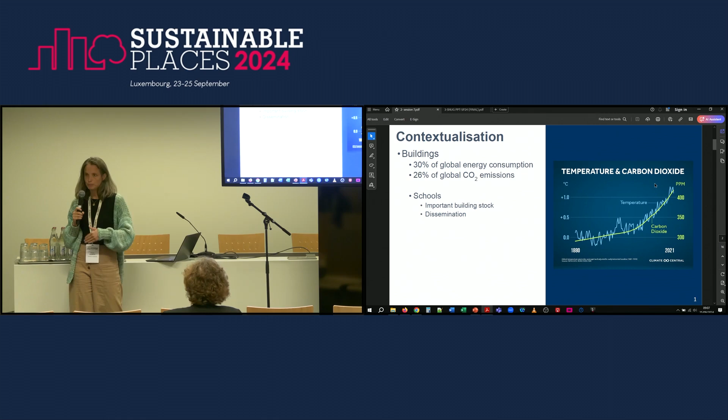The choice to work with school buildings is mainly due to the important emissions from the building sector, but also from the important building stock of educational buildings, older buildings. And of course, the great outreach and dissemination capacities of these buildings, where we are looking actually to work closely with students, citizens of the future, so that this can be replicated outside of the school environment.

Our approach is based on this 5-step methodology for schools to become more energy resilient. It starts actually by understanding the environment, which means knowing the different stakeholders. I don't know how it is in your countries, but we are working in Luxembourg and we have so many stakeholders in one educational building with very different interests, with very different approaches with regards to the building. So that's the first step, understanding who these stakeholders are, what they know about energy efficiency, what their interests are in working on that, what kind of resources they have, what kind of activity they already do.

And then to group these stakeholders in one working group, or as we called it, a learning community, so that we can profit from experiential learning using the school as a living lab. Then, in a second step, we propose to use education to actually engage with the community. It is very focused on the students, of course, the main users of the buildings, but of course including staff, teachers, and everyone that is related somehow to the way that the building is operated.

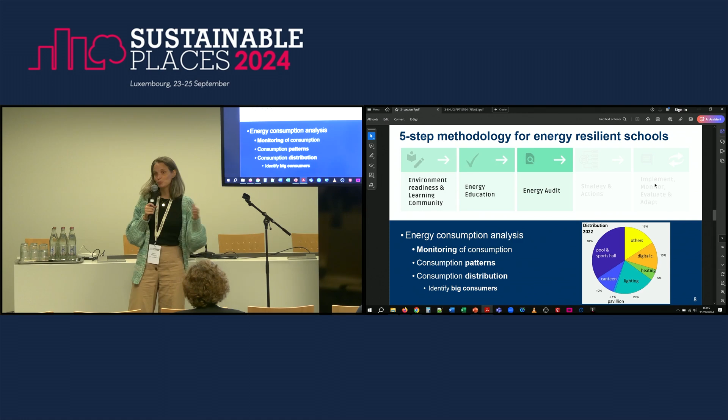Another analysis that we propose is to identify the different users, so the big users. So we install smaller electric meters to identify more the distribution of the electricity consumption, where here, for example, we can see that for this building, lighting is responsible for a big part of the consumption, but the sports hall and the swimming pool are responsible for more than 30% of the total energy consumption of the building.

And then we can start thinking about a strategy to reduce the consumption, discussing again with the community and trying to find solutions that would be adapted to their requirements and that could provide great impact. So as I said, we focus a lot on acting on the baseload consumption, and we propose these reduced operational modes for these periods. When the building is not being used, we don't need to heat as much. I know it sounds very obvious, although it's not.

And that's why we need a good monitoring plan, because people think they know how the building is being used. But when you start analyzing the data, the consumption data, you see that actually they thought the things were off. They thought that the equipment was not running. We need a follow-up. We need people following the way it's being consumed, and then adopt the proper operational set points.

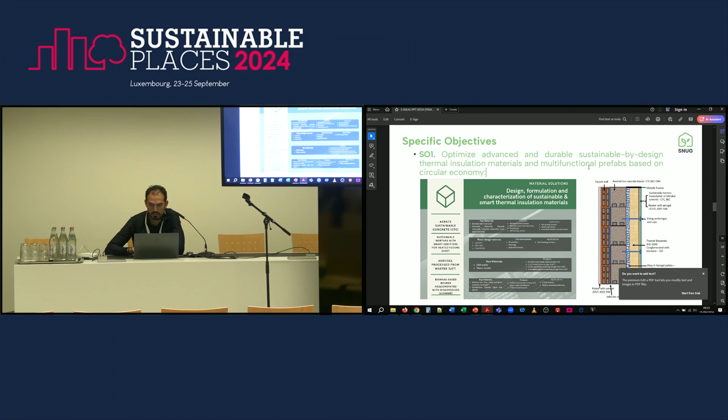a wall. And the other one that I'm gonna go deeper into, because it's ours, developed at AIDIMME, is the biomass-based boards agglomerated with bioadhesives. We started studying many biomasses like rice husk, hemp, posidonia, sunflower. And the bioadhesives are made by another company called Chimar from Greece. They're experts in this part, and they're made out of tannins, lignin, and starch. What we want to develop is an ETICS system for outer insulation, and it also could be used for indoor insulation.

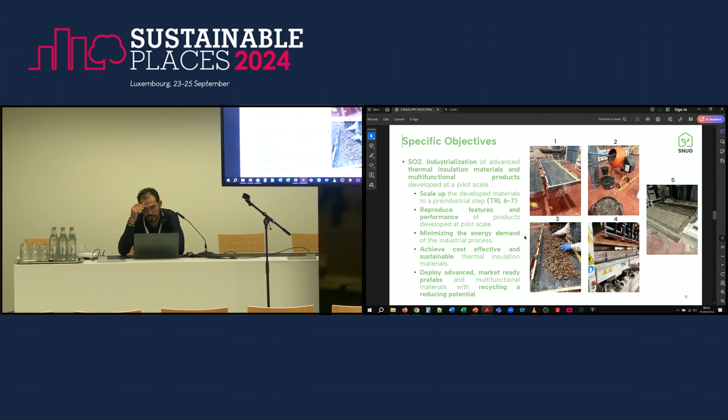The second specific objective is to industrialize these products. Now you can see some pictures about the industrialization that we made in another national project. So this is like a background about what we're gonna do now. We went to an industrialization company, and they prepared some molds. Then they prepared the mixture, this is with Posidonia specifically. Posidonia oceanica is a sea plant that is protected because it's one of the most important oxygen providers in the sea.

And this Posidonia is taken out from the coast, from the seaside. And many times they just burn it, and there's nothing done with this material. So we take it, we dry it in some big dryers, just in the sun, no energy used for this. And we mix it with the adhesive we're gonna use. And then with hot press plates, we make these panels that you can see in image number 5. Okay.

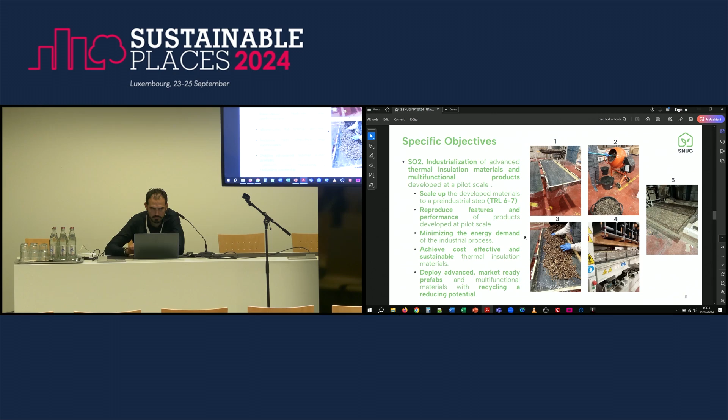Also, as I told you, we are gonna make this digital assistant tool. The purpose of this tool is to select the best thermal insulation solution and installations depending on the geography and climatology. Our developments are gonna be demonstrated in 3 different countries, 3 different buildings. The first one is in Switzerland. It's a residential house. The second one is in Spain, in Castellón, near Valencia. There are offices and also a manufacturing building.

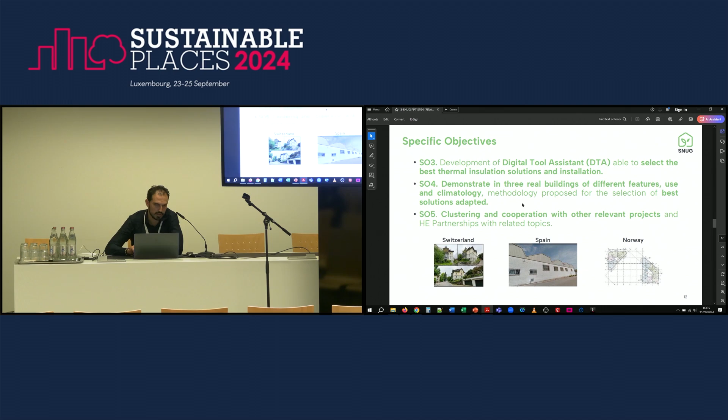And the other one is in Norway. It's a new residential building. We just have the model for now, and they're finishing the construction of it. As a background, we have done a national project in Spain, in Valencia, where we put these panels. These ones are made out of rice husk.

Can I stand up with the mic? Sorry? Can I stand up with the mic so I can? You can hear me? Yes.

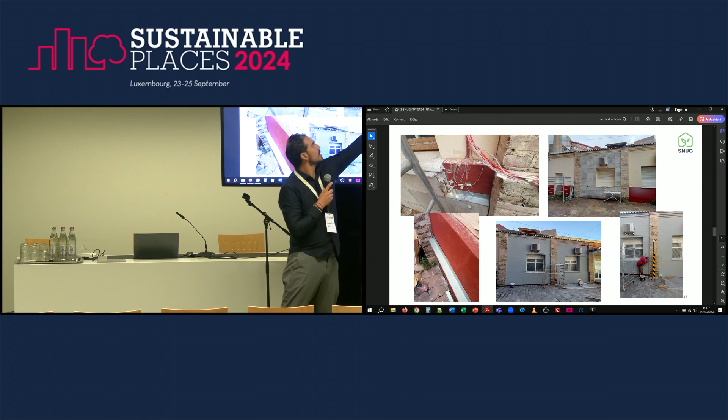Okay, so this is the core. This is made of rice husk, and the outer layer is made out of mortar, where 60% of the sand is recycled from construction and demolition waste. So we put some thermal sensors in each of the layers. It was an existing wall, so we put them also in the layers of the wall, and with them we monitor the changes of temperature and compare here without our material and here with our material, as they are like twin facades.

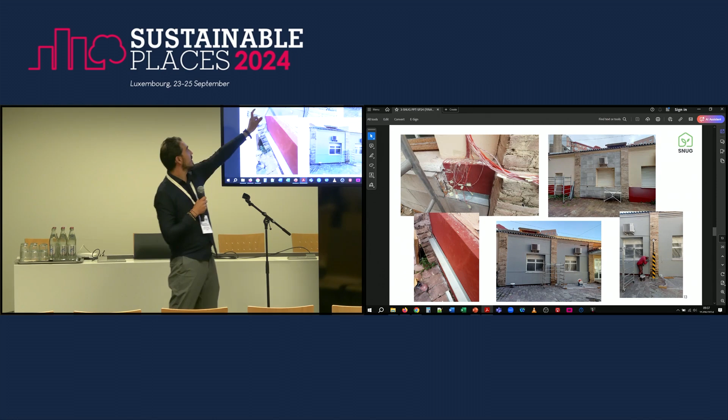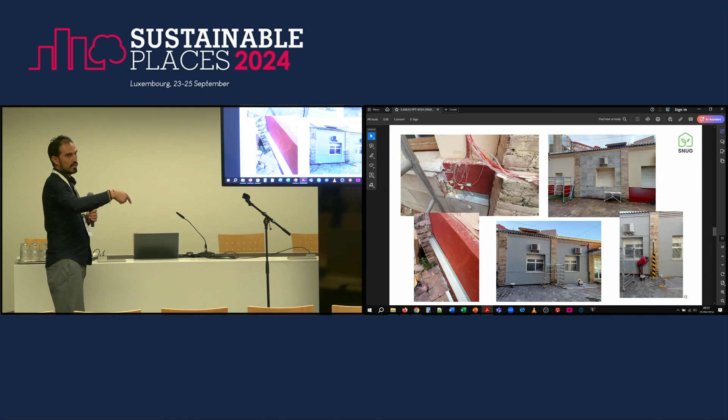These are our mechanical profiles where we put the panels. Now we want to use less aluminum because of its embodied energy, and just use it, or change material if time allows, only in the connection parts. So this is how it looks after with our solution. With our solution, we put a meteorology system to take temperatures, outer, inner, the rooms, and also all the temperature sensors that are in each layer. Okay.

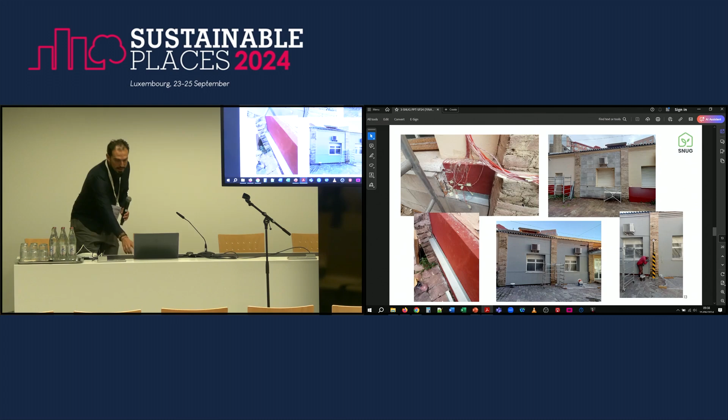Okay, our KPIs will involve circularity, the percentage volume of end project you can reuse of the materials, the embodied energy, CO2 emissions, and counting on biopanels and also the sandwich panels. We name sandwich panels when you have the mortar layer also. Also thermal conductivity, dimensions, reaction to fire, that it's important, and volatile organic compounds. These are the values we want to afford with the project.

And for now, we have tried many combinations of materials. We have used hemp, rice husk, sunflower, citrus waste, and Posidonia. It's also nice to say that we are using biomass waste that is local waste. There is lots of it in, for example, the Comunidad Valenciana, or hemp or biomass that you can find easily anywhere. So it's easy to industrialize these products.

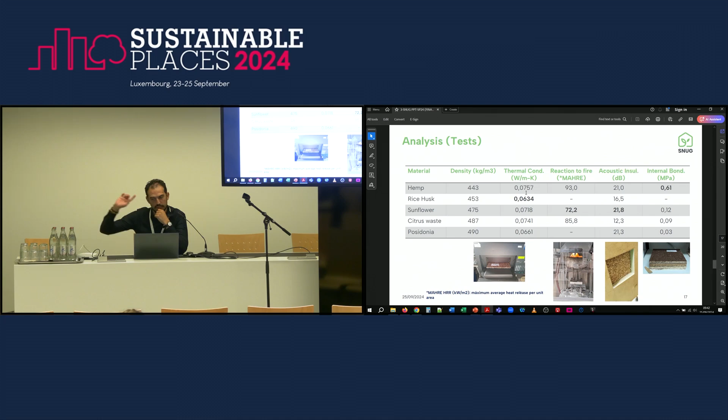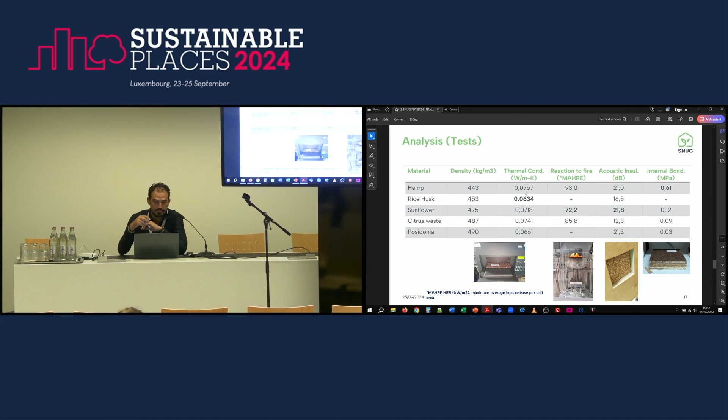And also we have to replicate the first trials, as you can see in the last picture, to the right. There are all the different combinations. So we have to take a decision about the density, about combinations, the quantity of adhesive we are going to use, etc. So there's still work to do and values to take out about this project.

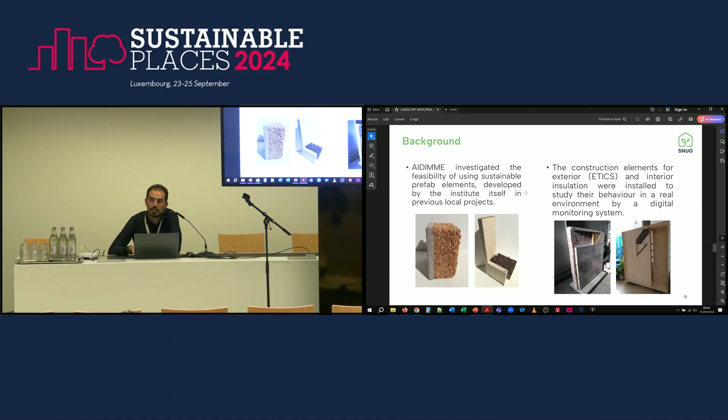I had a question about your pilot demonstrations. Will you be applying it in parts of the building where you can control the other aspects, maybe heating or ventilation that could affect or could be affected by the new installation, or are you looking at a more global replacement of all installations in the buildings? So is it selected parts of the buildings or completely? For demonstrating, or for an end use?

Demonstrating. I think there were 3 pilot cases, right? Yes. Like this one? Yeah. This one is just to study 2 different rooms. So we can analyze every layer. When I say every layer, it's the mortar layer, the rice husk insulation, and also the insulation that was existing in that building before. So we compared the temperatures inside.

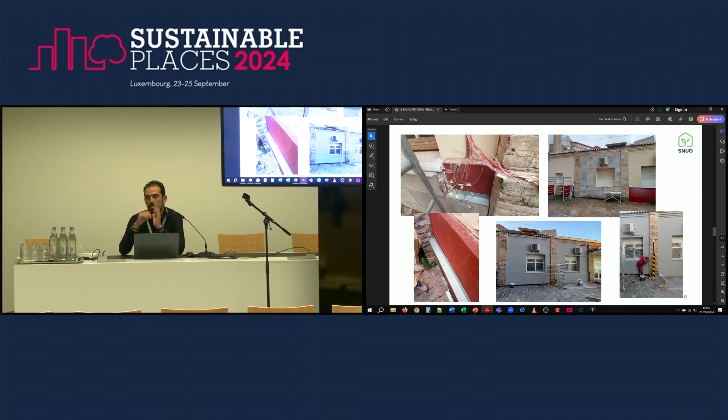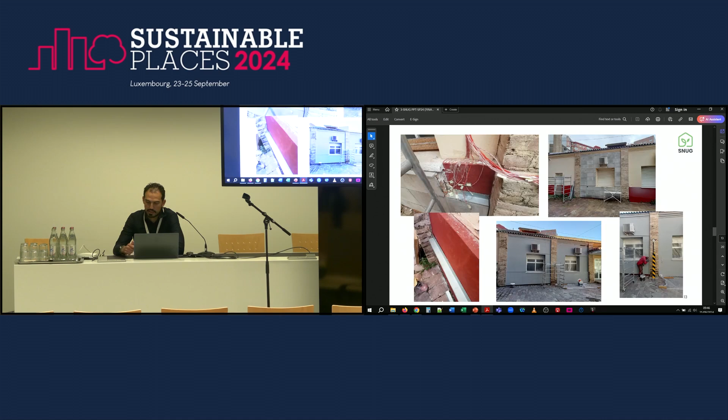So it's working, and we have to make some more evaluations, and also we are going to monitor the new demos. The new demos will also have moisture content analysis and monitoring. So that is another thing to take into account.

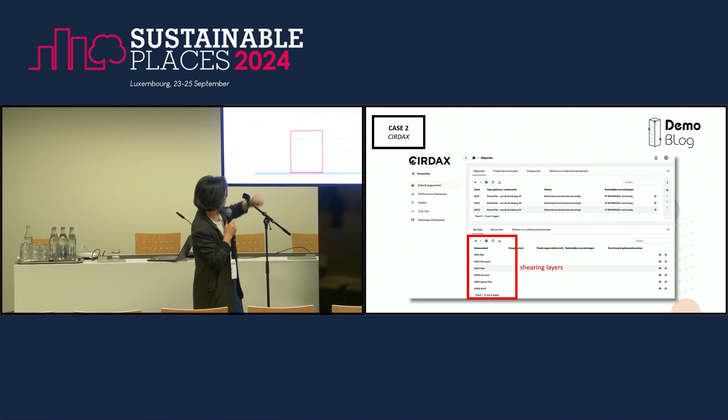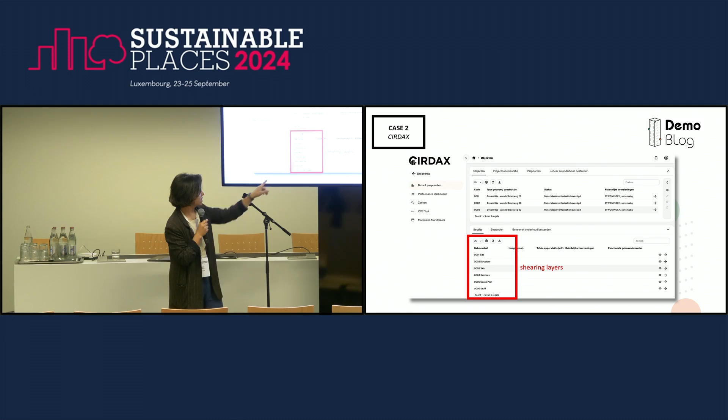The second one is CIRDAX. CIRDAX is really focusing on inventorizing the building materials. As you can see, they created here the Dreamhouse profile. Is anyone working on circular economy? You a little bit, but anyone else? Are you familiar with shearing layers? In buildings we have different layers like site, structure, skin as the facade, services, space plan and stuff. So they use this structure to collect data.

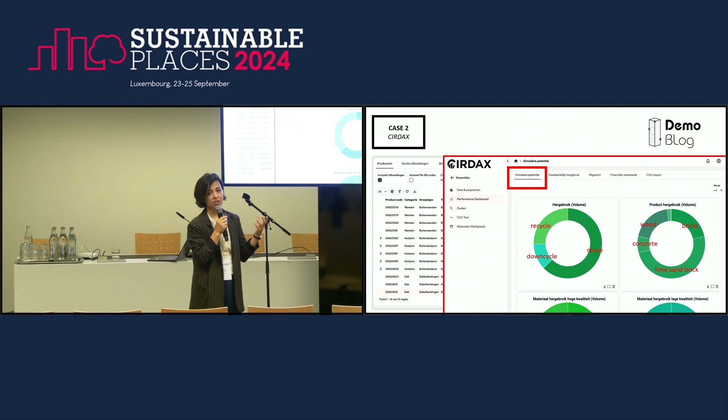I just clicked on skin, meaning the facade. So here you see all the walls, and they enter really basic features of the outer walls. Indicators, sorry, I missed that part. By collecting all that data, they give insights into your building: what percentage has reuse potential, or is downcycled or recycled in the entire building. They separated it into different materials as well, and they are now working on the cost and CO2 calculations as well.

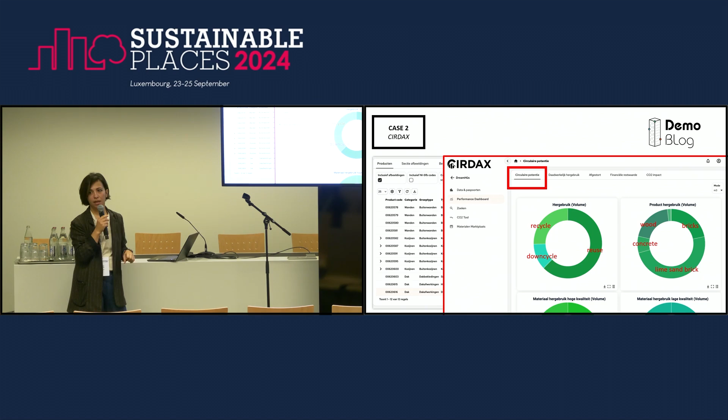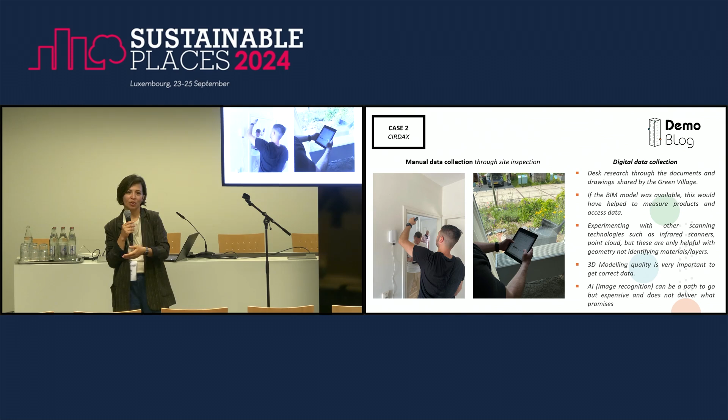After that, we did some interviews to understand what other technologies can help improve the data collection method. For example, BIM models are really important. They can extract data, but the models should be really correct. Sometimes the thickness or the material layers are different than in real life, so they say they spend more time fixing the model than checking the real building. That's a practical insight we got from them.

With other European projects, they are experimenting with other scanning technologies like infrared scanners and point clouds. These are also helpful, but you get the geometry, not material information, so you have to go to site again to check. Eventually we came to the role of AI through image recognition. There are tools in the market that fly drones and take photos of buildings, or use satellite images to recognize windows and measure. These tools can be really helpful, but eventually we need a combination of human and technology.

My time is running. I have to run as well.

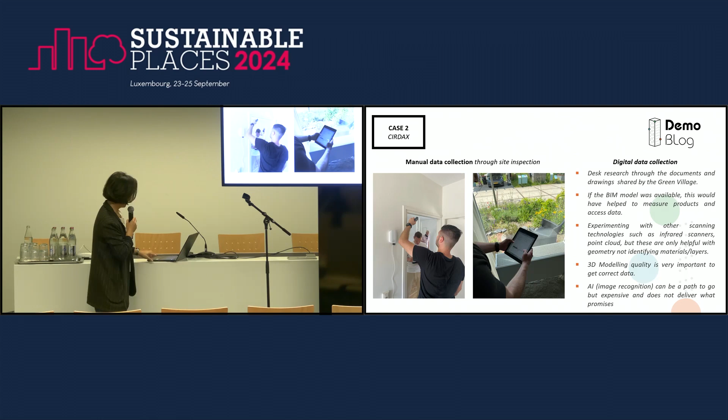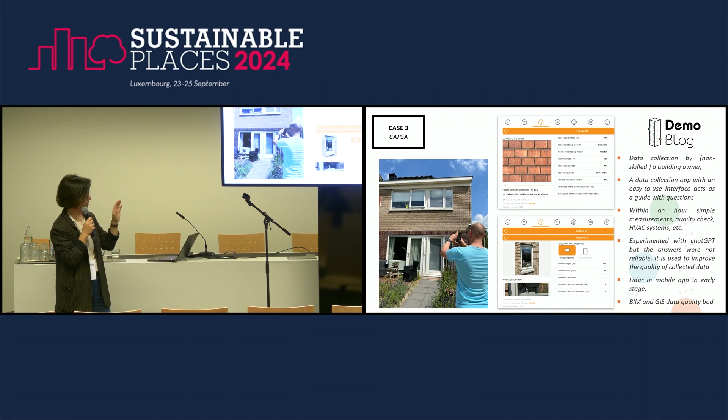Yeah, about that, but I can't really show that. There are some images of really bad looking facades as well. So with that model, actually, they can create a model and give you renovation advice. In terms of other technologies, they experimented with ChatGPT to actually recognize windows and stuff, because they have thousands of pictures from their building stock.

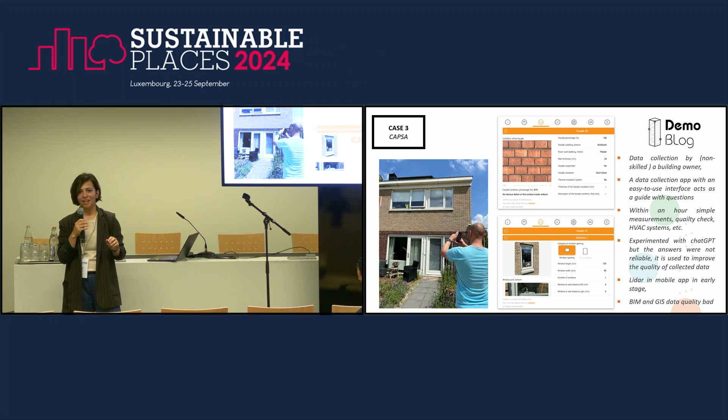They say it's poor quality. ChatGPT failed, but what they do now is they actually use that kind of Gen AI tools to check the quality of the data collected by humans. Also, they had similar concerns about BIM and GIS data. They are useful, but really hard to integrate sometimes, because you have to fix the models and stuff. And they said, we need an hour to go to site to collect data. We don't have to spend hours fixing the models.

So in conclusion, understanding data requirements and indicators is really important for DBLs. We have many technologies available, but it doesn't mean that they are helpful and cheap. So we need affordable solutions. And we need to do more experiments to understand how we combine human capabilities with digital applications. So if you're familiar with any kind of data collection technology, please let me know so we can include it in our research. Thank you very much.

Yeah. Thank you, Sultan. Is there any question about the DemoBLog project or this particular aspect? Yeah.

Thank you very much for the interesting research. Ji Yang from ArcelorMittal, research engineer. I have a question about the reuse potential that you mentioned in one of your slides. Is reuse potential data within the scope of your research, that it can be implemented in the logbook? And which kind of indicators or assessment method would you consider or recommend for this reuse potential assessment?

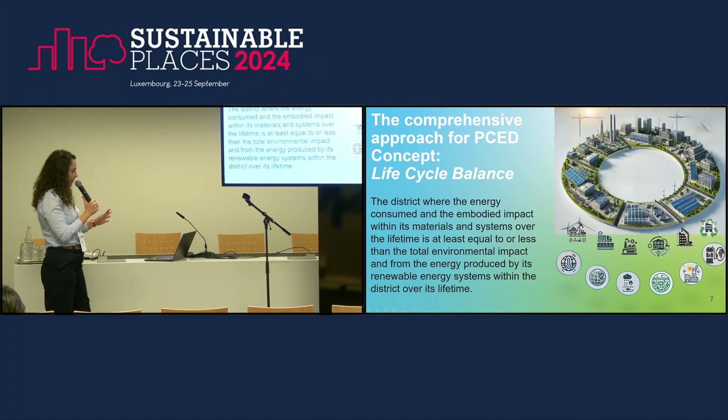So our concept is, should we consider the whole life cycle, and when we are working on the impact definition from PEDs to PCEDs, should we consider those impacts I mentioned before? And this is the basic definition that we are proposing right now, but as I said, this is progressing, and the project is in the beginning stage right now. We will develop more ideas around this with our project partners also.

And let's move on, that was the impact part. Besides the energy and carbon footprint, what should be the other impact categories when defining the PCED? But we also have the critical elements when we are designing the PEDs. Those are the PEDs' critical components, and those are mainly based on the energy concept, e-mobility structure, and the urban macroform and land usage context data.

This is critical when we are considering where the solution would be more easily expanded, and even selecting the technological solution. Those are our components right now when we are working on defining the suitable areas for possible PED development. So this is the other part besides the impact.

We included the environmental context data from the spatial, besides the critical elements you showed before. Should we also include the environmental context, I mean urban environmental context data also, which are already available?